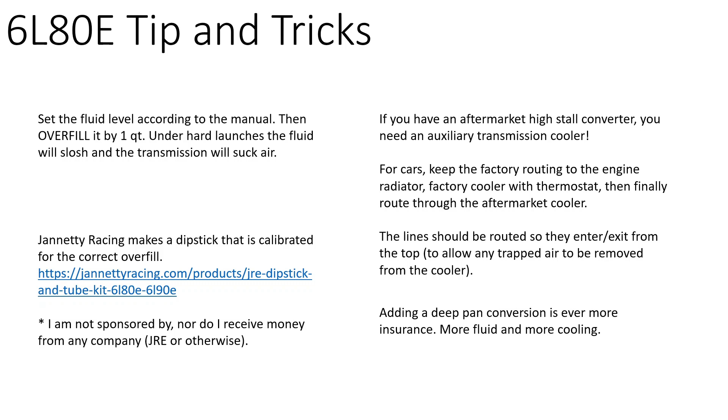You can also provide extra cooling and fluid capacity by getting a deep pan conversion. Depending on ride height, that may be an issue. I was looking at the B&M one. It adds 1.8 quarts of capacity, and with the cooling fins, they only stick apparently 3/4 of an inch lower than the factory pan. So not that bad, really. Hopefully you're not that close to the ground driving on the street. But anyway, that's just something else to consider.

So here's a picture of my setup. You can see the cooler's here. It's mounted onto the front bumper, the internal bumper, hidden behind the fascia and the grill. And the AN fittings are pointed straight up and down for air to come out. OEM thermostat is in there.

If I ever have problems with overheating, what I'll probably do is just remove this thermostat and run without it and test it. If that doesn't work, I may put it back in and then bypass the engine radiator. And then if that doesn't work, then bypass them both, and I'll just run through the factory cooler and the aftermarket cooler. But so far, so good. I've had good luck. It's working out good.

All right, so the weak areas. The factory JMBX converter is really the problem child. So I found this great picture of a cutaway view that someone did on the converter. And basically, this is like the piston that comes down under pressure and it can deflect. So, we were talking about the torque converter pressures, the apply ramp and all that kind of jazz. Well, too much pressure is going to cause it to not warp, but deflect or deform. And so you can see you kind of have a small contact patch here. And so less contact, less friction, more slippage, more heat.

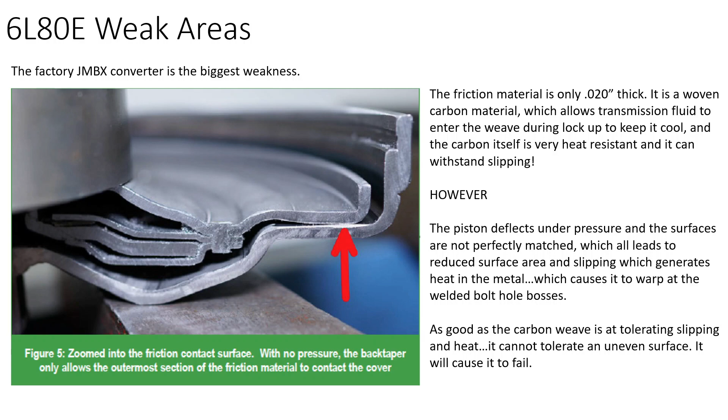It's made of metal, and that is a problem because here's a picture of my factory converter, and you can see these tabs. This is the engine side, right? This is the flex plate right here, and this would be facing the engine. Well, here's the boss that's welded on for the bolt hole, and you can see it's welded on.

Well, welding introduces tension and stress in the metal, and when you start adding heat, it's now going to begin to warp. And as good as that carbon weave is at dealing with heat and slipping, the one weakness, the Achilles heel that it has, is it needs a flat, smooth surface. So as the heat builds up, this cover starts to warp a little bit and it just destroys that carbon weave, which is only 20 thousandths of an inch thick.

And so then that carbon starts going through the transmission fluid. Next thing you know, you get metal to metal and bad things happen. And then you are not a happy camper.

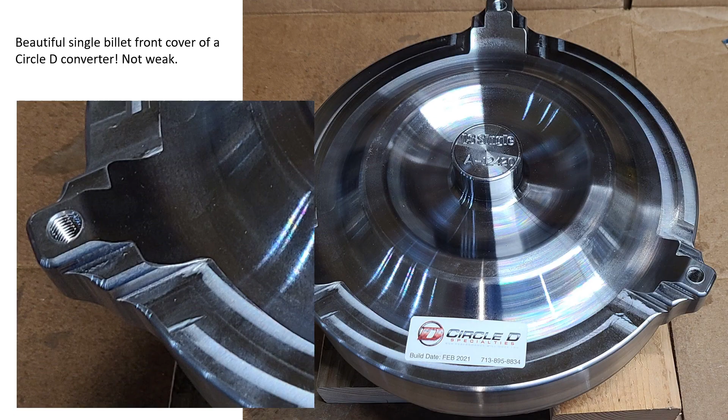By contrast, here is a picture of my personal Circle D converter. And you can see it is a one-piece billet CNC machined, and it is a gorgeous, gorgeous thing of beauty. It is a shame to cover that up with a flex plate and then throw that thing in the bowels of the drivetrain, never to be seen again. But I'm happy I get to share this with you guys. I hope you enjoy looking at this as much as I do.

Speaking of Circle D, I said I would maybe follow up with these guys, see what their viewpoint is on how much pressure I should be using or not using to lock up the converter. And I was so disappointed with their reply. I mean, I get it, right? CYA, they don't know who's out there doing what. And so they're just like, go hire someone else to tune your car, you noob.

I get it. So I'm like, well, hey, at least tell me what's the maximum pressure, right? Because after reading about the piston on the factory JMBX converter deflecting under pressure, I'm thinking, man, I hope I don't do that to mine. Like, what's burst? If I buy an intake and I'm gonna put a turbo on it, I'm probably gonna ask the manufacturer what's the maximum PSI I can throw at this before it bursts, right? So I figured that's probably a safe question to ask about the converter.

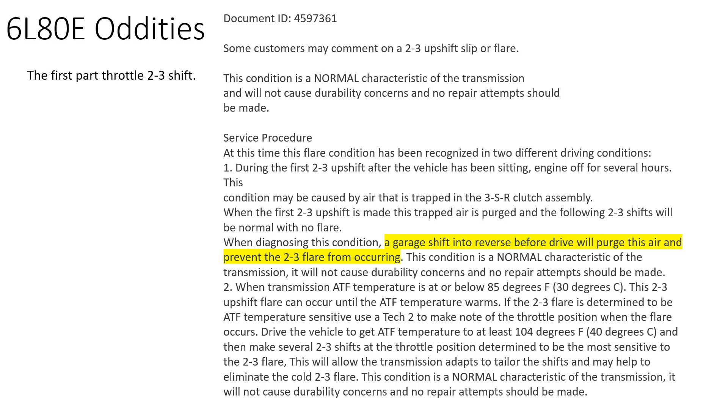All right. So keep this in mind for my biggest gripe and my biggest concern: the first wide open 3-4 shift does the same crap and it pisses me off. Now, normal day to day, obviously this isn't a big deal. But when I'm at the drag strip, it just ticks me off. And the reason why is because you normally make a pass, and then depending on how busy it is that night, you may not get another pass for 15 minutes, half hour, maybe an hour.

So you're sitting there with the hood up, trying to keep everything from heat soaking, and then you get back in the car. You're idling through the pits and the staging lanes, whatever. You get up there and it's finally like, okay, this is it. I've been waiting an hour to make this pass. And for me, you're halfway down the track, and it's the very last shift, this 3 to 4 shift, at least for my gearing, and it hangs. It takes forever to shift into fourth, and while it's waiting to shift, the RPMs just continue to rise and rise, and then it does a hard shift, and I hate it.

Now, this was really a problem on street tires because when you're on street tires, you drive around the water box because you don't want to get them wet because of all the sipes and the tread. And you can't do a big burnout because street tires aren't made for that kind of heat and they gum up and they ball up and you lose traction. So you just got to do a little baby burnout to keep them happy.

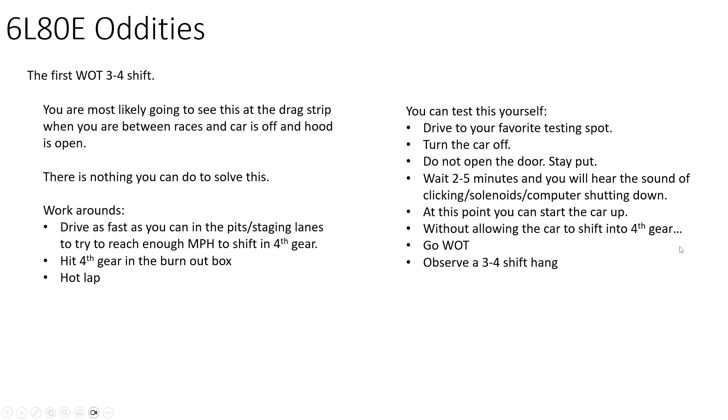All right, so let's just wrap everything up with some conclusions here. Just a quick review. The shift time and pressure. I think I kind of botched that first analogy I made about goal and budget. Your goal is the shift time. That's the only thing that matters. The budget is the pressure. That's how you achieve your goal. And really, the adaptives are in the background to say, hey, let me help you out, I can save you some money on your budget. So don't sleep on those adaptives.

The next thing is, if the adaptives make the transmission start going soft over time, that's just an indicator that your shift times are not aggressive enough and you commanded too high of a pressure. Remember, old school thinking, before you had computer controlled engines and transmissions that were synergistically talking to each other, there was no torque management, yada, yada, yada. So how did you make those old transmissions shift fast and with authority? Well, with pressure. But that is not the case on the new ones. Time is what controls everything, the shift time. The pressure is just how you get there.

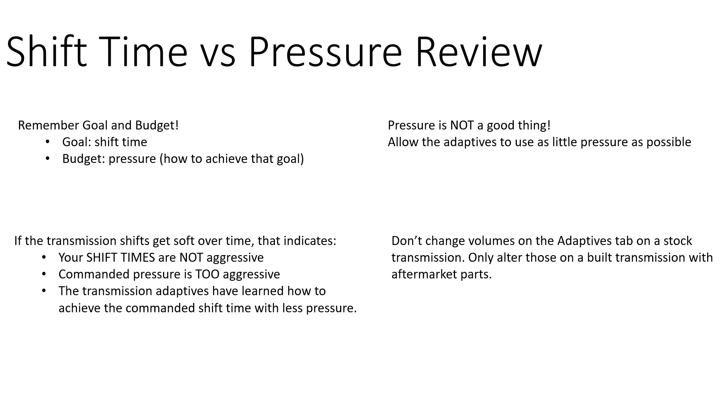Yeah, so pressure, not a good thing. Allow those adaptives to use as little pressure as needed to get the job done. Otherwise, you're going to start wearing things out faster than they need to. Speaking of adaptives, do not change the volumes for the adaptives on a stock transmission. Only do that if you've thrown in aftermarket parts and you have the specific data. Even if you do change them, they will fix themselves over time. But stock parts, keep the stock volumes. Don't mess with them.

Torque management. A lot of people will disable torque management. I would highly suggest not doing that if you would like your transmission to live a longer and happier life. Torque management is also going to be one of the biggest factors in how the transmission feels when it shifts.

So as you go through tuning, you need to kind of use your calibrated butt dyno and feel, well, what is the difference of too much or too little torque management? What does too fast or too long of a shift time feel like? What does too much or too little pressure feel like? So you should make one change at a time and see how that changes things. And then as you start tuning more and more, you're like, oh, you know what? That's too much torque, I need to calm that down a little bit, rather than messing with time or pressure or something.

Virtual torque is also going to play a huge role in how the transmission shifts, because the transmission is going to look at how much torque is being generated, and therefore how much pressure do I need when we're making this much torque? So if you artificially, so to speak, increase torque through virtual torque, you're also going to indirectly increase the amount of pressure the transmission is going to use.

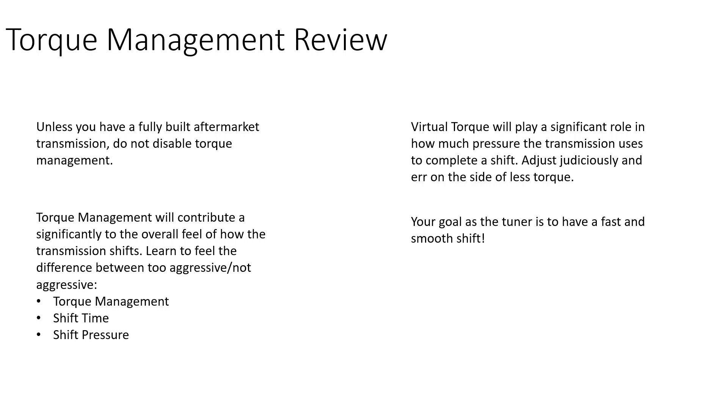As you recall, I showed you some histograms that you can set up. I didn't go into detail, but if you saw that, you should understand the gist of how to get those set up to log your torque, so you can figure out how to adjust your own virtual torque. Bottom line, your goal as the tuner is to have a fast shift, but a smooth shift. You don't want a rough, clunky, uneven shift, right? You want a full cup of coffee on the dashboard as you shift. It does not spill.

Shift scheduling. Just make sure that the full throttle, the 100% spot on your part throttle tables, matches and meets up with your wide open miles per hour. They should basically meet, touch perfectly. Dialing in wide open throttle is going to take a little bit of time to determine the lead time needed to get the shift to occur at either the correct miles per hour or the correct RPMs. And as you recall, I did create that spreadsheet that will back calculate lead times for you if you just plug in a few basic pieces of information.

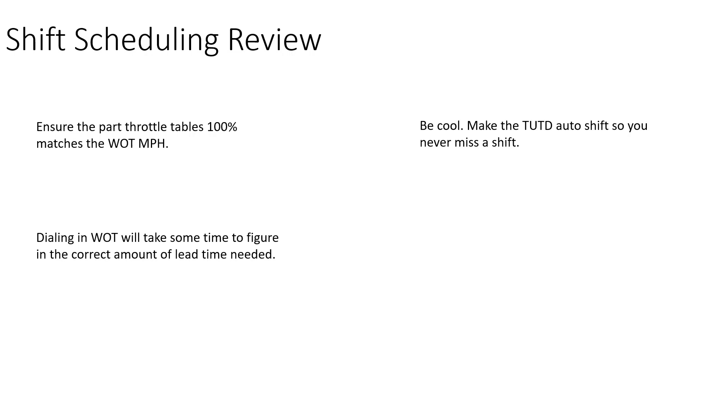Also, as mentioned before, be cool, Daddy O. Don't be a square. Use the tap up, tap down. You have a super hyper modern day electronically computer controlled transmission. Use the super cool features, okay? For tap up, tap down, let it auto shift for you at the extremes. You don't want to look like a dummy and miss a shift in an automatic transmission. That is embarrassing. So, come on.

And finally, torque converters. Slip is a bad thing. Avoid it at all costs. Zero out the slip tables. Add pressure as needed to prevent the slipping. Keep it cool. Keep it under control. Unless you have an aftermarket converter with a multi-disc, or a multi clutch I guess I should say. It's late, I'm sorry. Yeah, multi-disc converter. You never want to lock up a single disc. That's just a recipe for disaster. Well, I should say, don't lock it up at wide open throttle. Part throttle, sure, go ahead and lock it up.

And then definitely you're going to want to log your line pressure and torque converter slip, just to make sure that everything is in simpatico and not slipping. Keep it cool. And if you have a big cam with an aftermarket high stall converter, just completely skip locking up in the early gears and save that for the highway gears, fifth and sixth, for part throttle cruising. So that's it. That's going to wrap it up.

I appreciate you guys sticking with me through all of these videos. I had no idea I had this much to talk about. And honestly, I learned a lot making these videos, forcing me to re-examine everything that I thought I knew and double checking. I can't tell you how many changes I've made to my own tune. I thought I had it finally sorted out, right? But after this, I've redone quite a bit, even after making these videos.